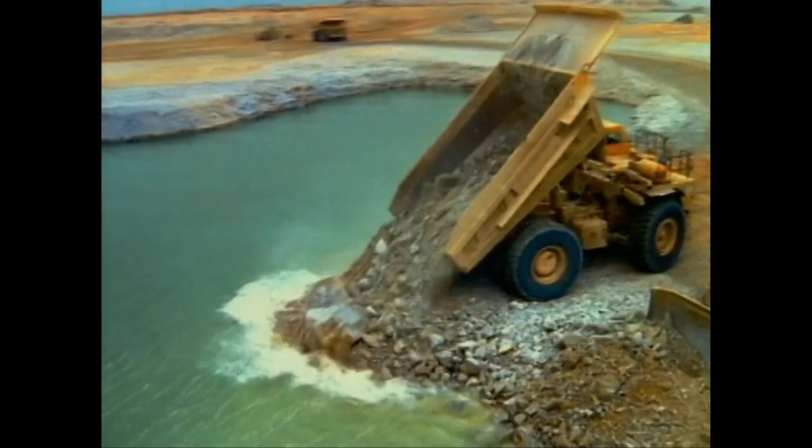Hong Kong desperately needed a new world-class airport. But where to put it? There was only one option: to build it 16 miles out at sea. But that would require the largest engineering project in history. It would mean building the longest bridges in the world and massive new underwater tunnels, 22 miles of new superhighway, and high-speed rail.

Builders estimated the project would take decades, but they were given only 7 years. Could engineers and builders working on an absurdly tight deadline pull off a project this extreme? And would building such colossal structures only invite disaster in the future?

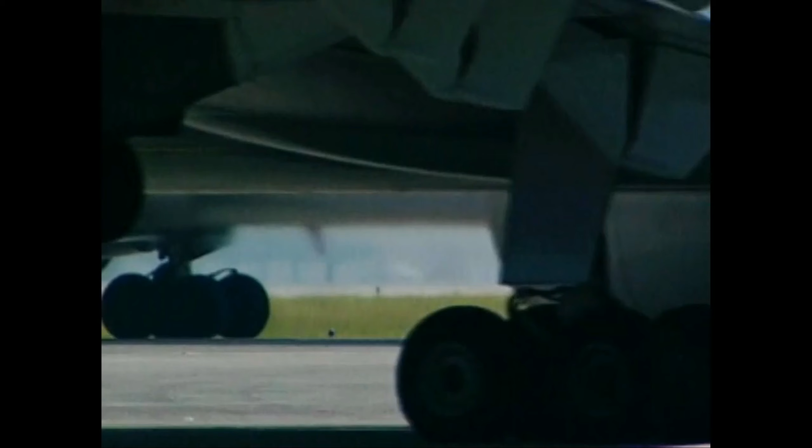July 6, 1998. New York's JFK Airport. Cathay Pacific Flight 889 prepares for takeoff. It's bound for Hong Kong, but it's about to fly into a great unknown. The pilots have made this trip hundreds of times before, but never like this. Because even as the plane lifts off in New York, in Hong Kong, the airport suddenly goes dark. It's not a power failure.

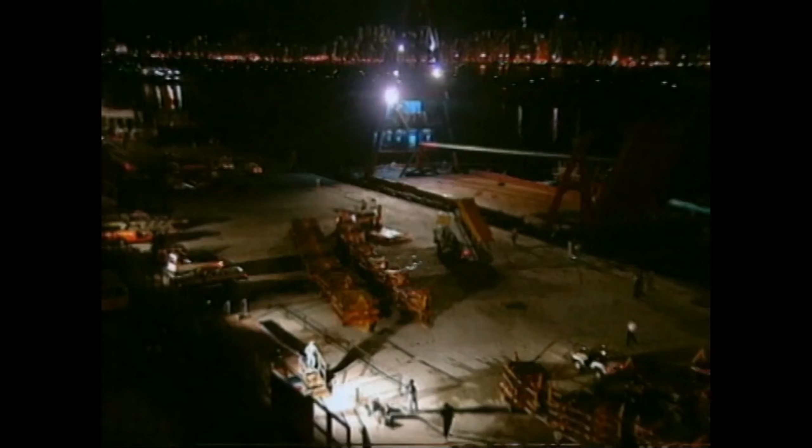This is an historic event. The culmination of nearly a decade of furious planning and construction. Hong Kong has just shut down one of the world's major international airports. And with planes en route, is moving the entire operation, staff and equipment, to a new one in only 7 hours. It's the final hurdle in a 7-year race to complete the largest, most ambitious civil engineering project of the 20th century.

It all began in the 1980s, when Hong Kong faced a critical turning point. By then, it had become one of the world's great economies. But these towering skyscrapers masked a glaring weakness. Kai Tak Airport. Dangerous and outdated, the airport sat crammed in the heart of the city. Kai Tak made every flight into Hong Kong a white-knuckle flirtation with disaster, forcing massive jumbo jets to steer past mountains and skim the tops of apartment buildings in order to reach the tarmac.

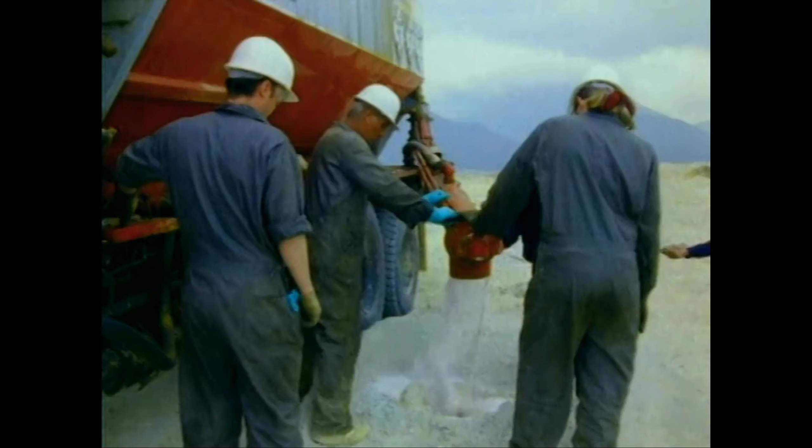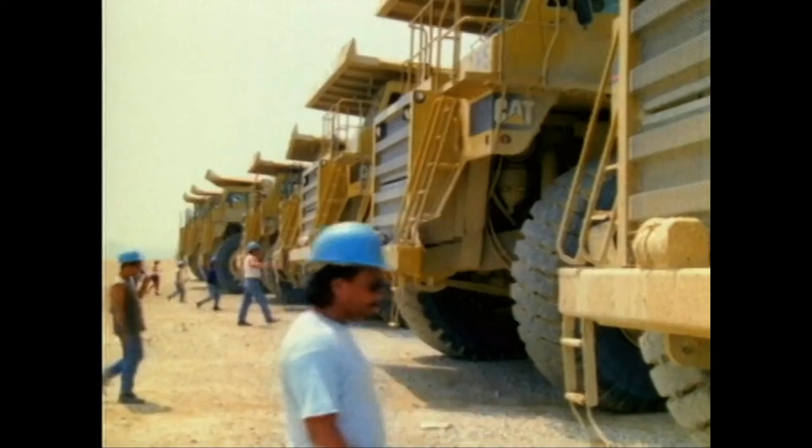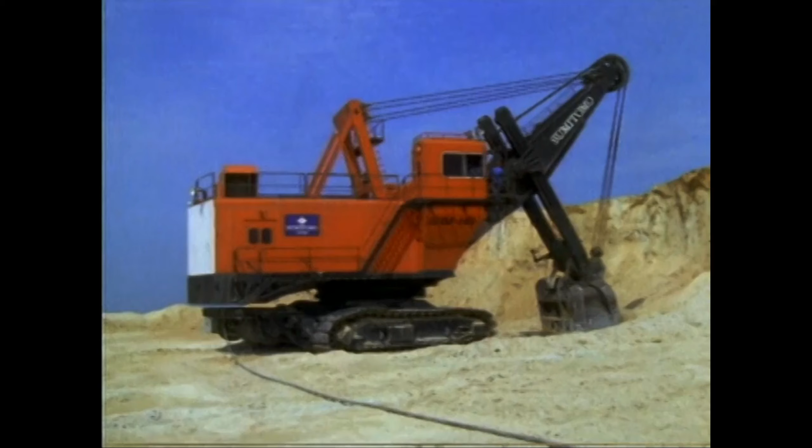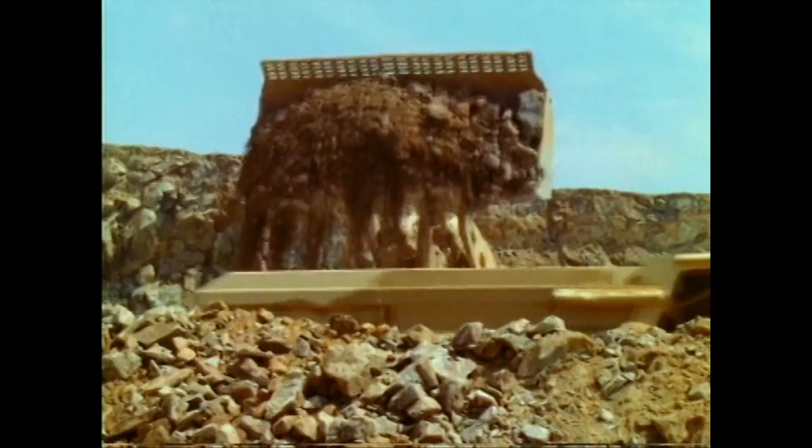With towering heaps of blasted rock as far as the eye could see, an army of workers was brought in. Their mission? Move 200 million tons of rock. Commanding giant earth movers, they demolished the landscape, carting away hundreds of millions of tons of rubble. But all that material would not go to waste. It would soon be recycled as fill to turn the two small islands into a single larger one.

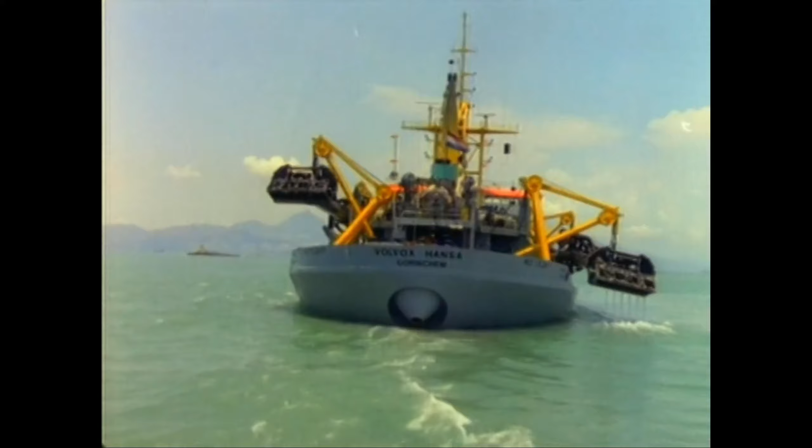But before that could happen, the sea floor needed to be cleared. For this task, a fleet of the world's largest underwater dredgers arrived on the scene. Like giant vacuum cleaners, their underwater hoses scoured the ocean bottom, removing a layer of soft mud 40 feet thick to expose the stable rock below. The cleared seabed provided a solid base for what was to come next.

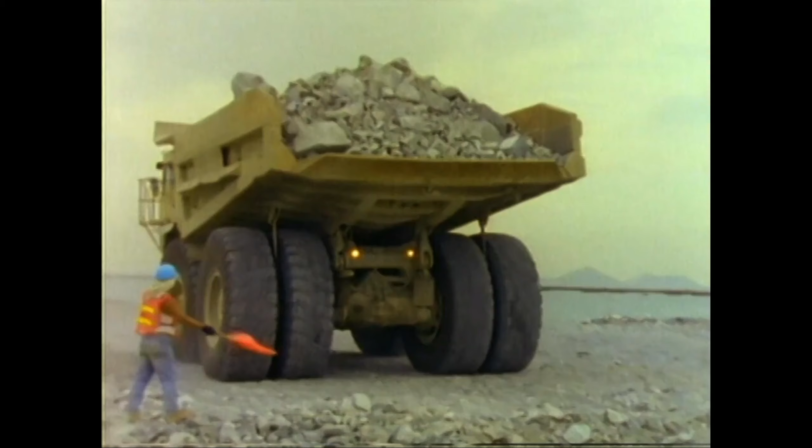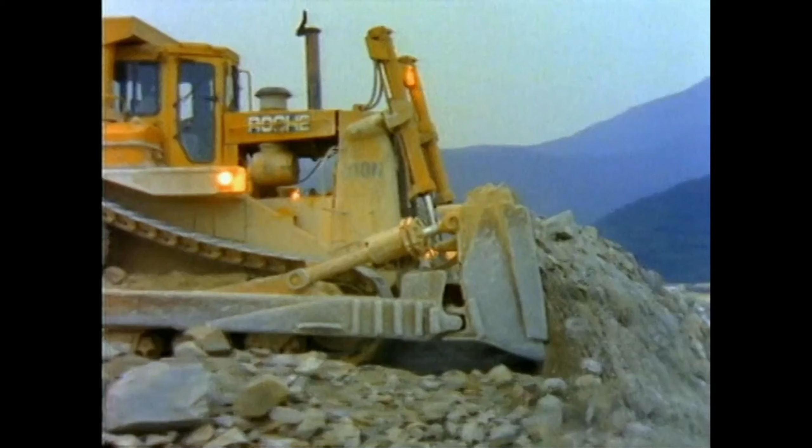A layer of sand, followed by the pulverized remains of the island's mountains. With every truckload, the mile-and-a-half gap between the two small islands grew steadily smaller. Everybody was under extraordinary time pressure. It was one of the world's biggest land-moving exercises in the history of the world.

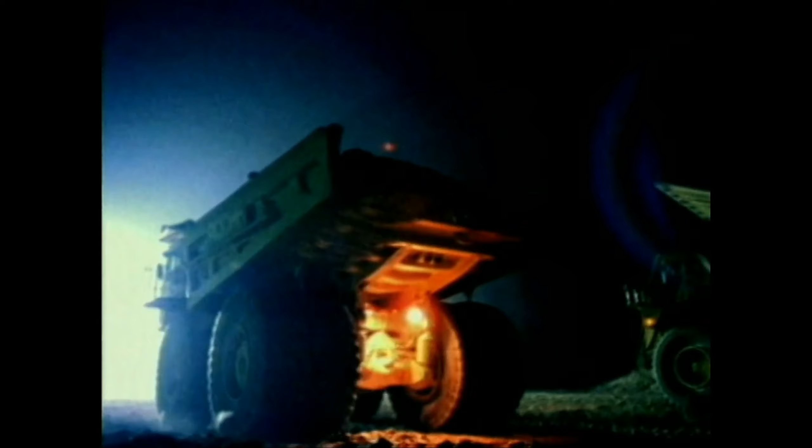Working day and night, inch by inch, workers on land and sea slowly turned two islands into one. By the time they finished, the workers had moved 600 million tons of earth, enough to fill the Roman Colosseum 200 times over.

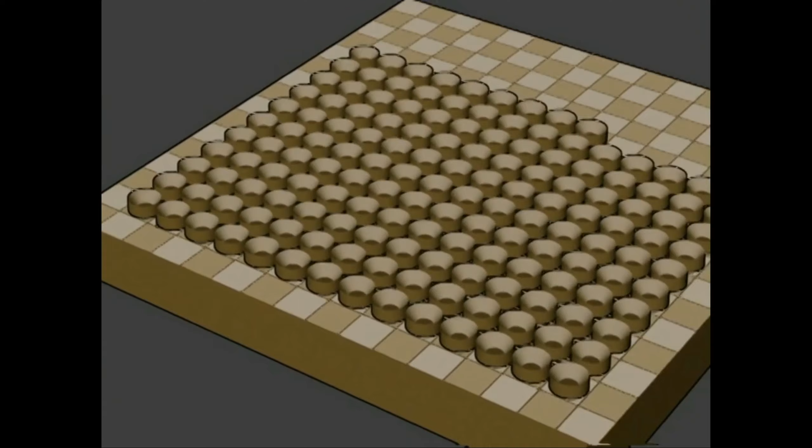As the airport island was taking shape, construction crews had begun the daunting task of connecting the island to the city. Plans called for new tunnels, bridges, and highways to be built across 22 miles of land and water. Almost immediately, engineers ran into a problem: finding a way out of downtown across Victoria Harbor. Two automobile tunnels had already been built in the harbor decades earlier, but they were now overloaded with traffic, sometimes causing 2-hour traffic jams at rush hour.

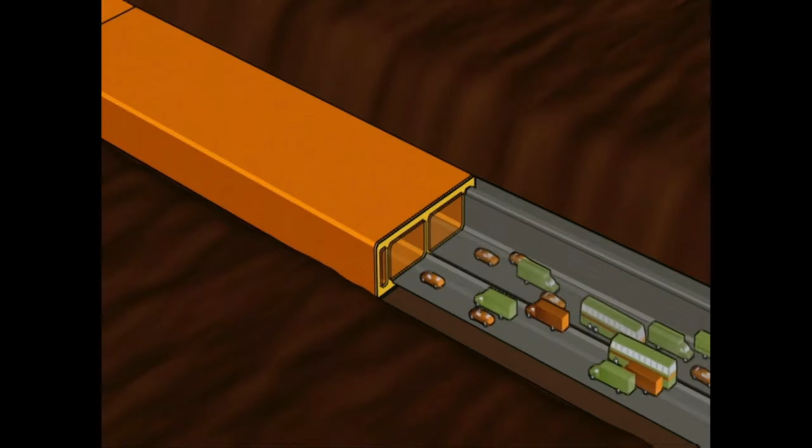A third, much larger tunnel was needed. It had to be wide enough to carry 6 new lanes of traffic and long enough to span the 1-mile underwater crossing. Engineers devised a plan to assemble the tunnel underwater from mammoth concrete and steel sections. The sections were manufactured at a harborside quarry 10 miles from the final tunnel location. Each one weighed 35,000 tons when finished, as heavy as a fully loaded ocean liner.

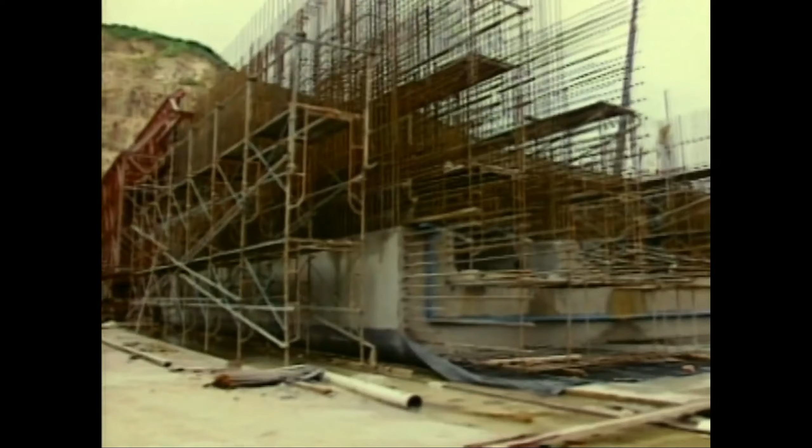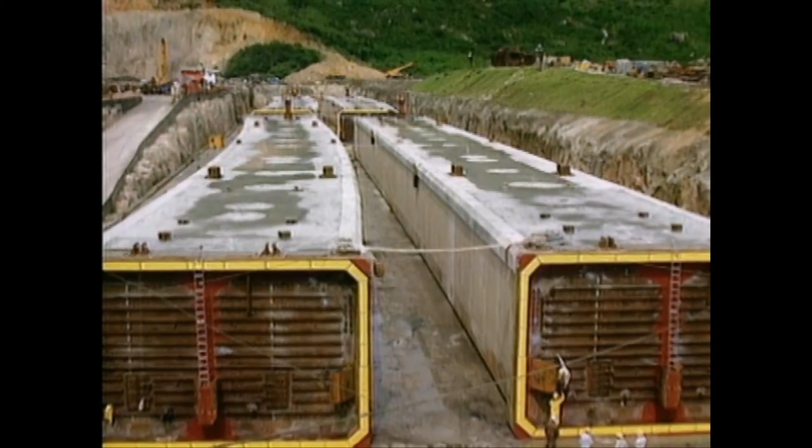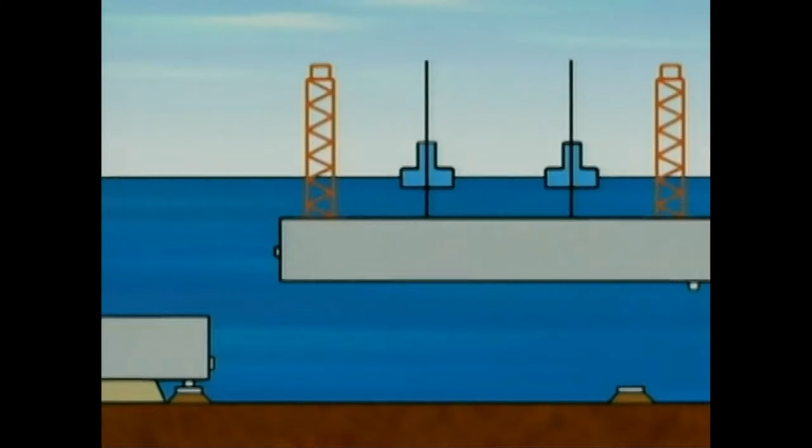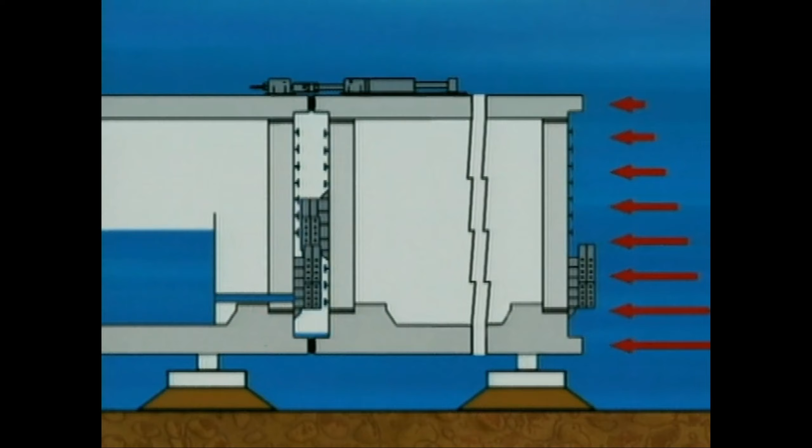When a section was completed, builders capped both ends with watertight seals and then flooded the quarry. The massive tunnel sections were then floated out into the harbor. Once at the final location, the seals were broken, flooding the section and causing it to sink. Powerful hydraulic jacks pulled the sections together and created a watertight seal. Then, builders made the final connections from the inside, and the tunnel was complete. It lay more than 50 feet underwater and stretched for more than a mile, connecting the busy island of Hong Kong to the mainland.

With one waterway conquered, an even greater challenge loomed. Along the proposed route from downtown Hong Kong to the airport, there was another major body of water to cross: a 3-mile span from the mainland to North Lantau Island. Initially, planners hoped to build another underwater tunnel here to carry airport traffic. But the channel turned out to be too deep, and heavy shipping traffic at the surface would have made underwater construction far too dangerous. So engineers had to come up with another solution. It was as bold as it was breathtaking.

They proposed not one, but 2 massive bridges, long enough to span the waterways and high enough to allow even the most gargantuan ships to pass underneath. The longer span, more than 1.5 miles long, would be one of the longest suspension bridges in the world. But it was a risky proposal. The bridge would need to withstand one of the most destructive forces on Earth. Typhoons. Packing devastating winds up to 200 miles per hour, as many as 8 typhoons slam into Hong Kong each summer. Any bridge built here would have to first prove its strength.

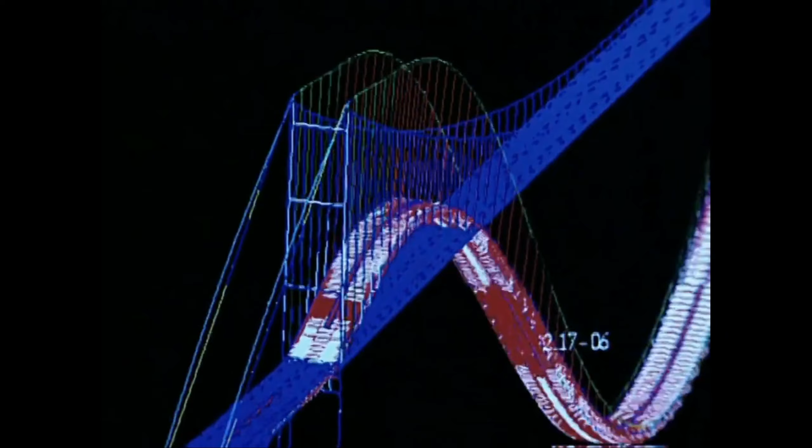To understand how winds would affect the structure, engineers first created computer models. This model simulates the motion of the suspension bridge in a 40-mile-an-hour wind, amplified 1,000 times, allowing engineers to identify potential design flaws.

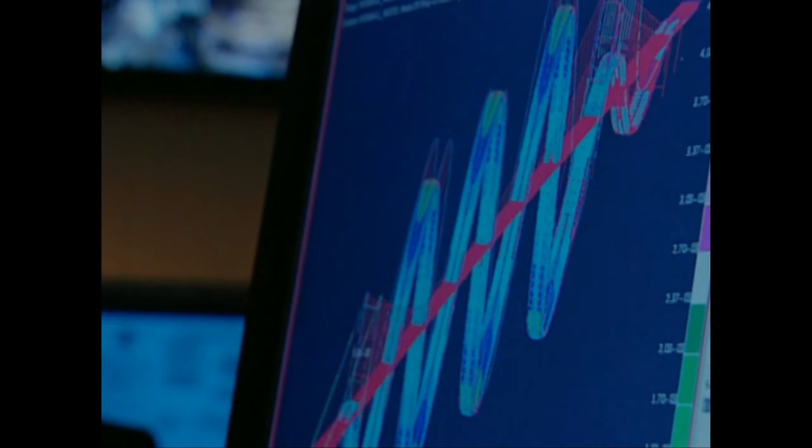Using the data collected, engineers next built a detailed scale model. They placed it in a high-speed wind tunnel and subjected it to a simulated Category 10 typhoon. The results were disturbing. The bridge would become dangerously unstable in high winds.

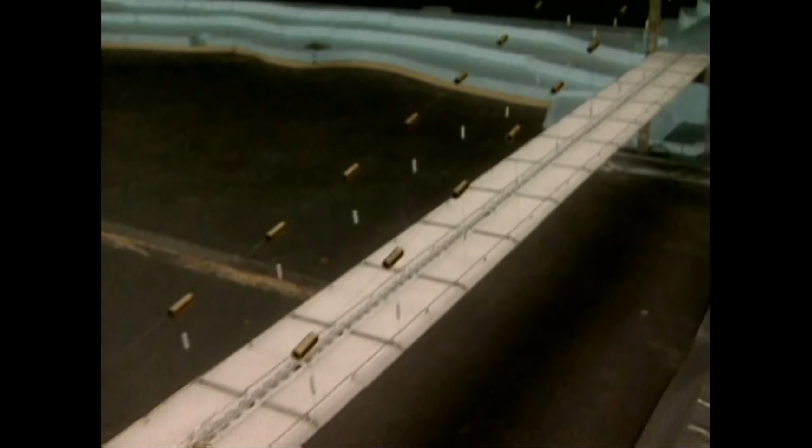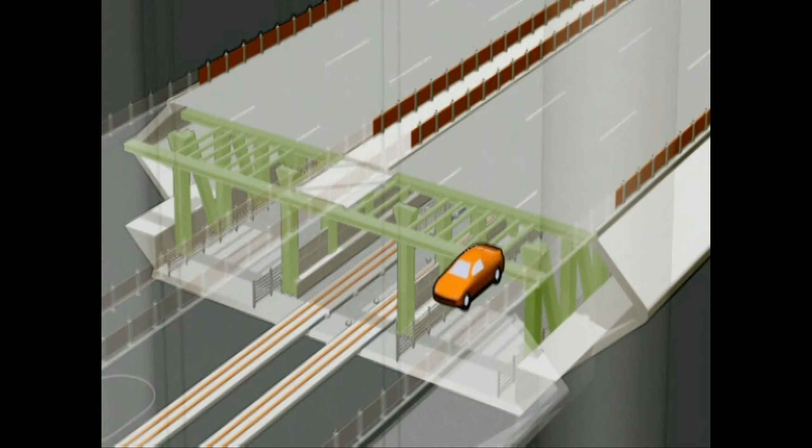Designers couldn't make the bridge any shorter, so they made it heavier. Below the main roadbed, they added a lower deck for trains and 2 more lanes for traffic. This design stiffened the bridge. It solved a potential problem and added capacity.

But for the builders, the design raised the stakes. Now they had to build the largest double-decker suspension bridge in history, with no extra time to do it. First, the building site was leveled. The next step, build 2 mighty bridge towers to shoulder the enormous weight of the fully loaded structure. They went up like skyscrapers, each more than 60 stories tall.

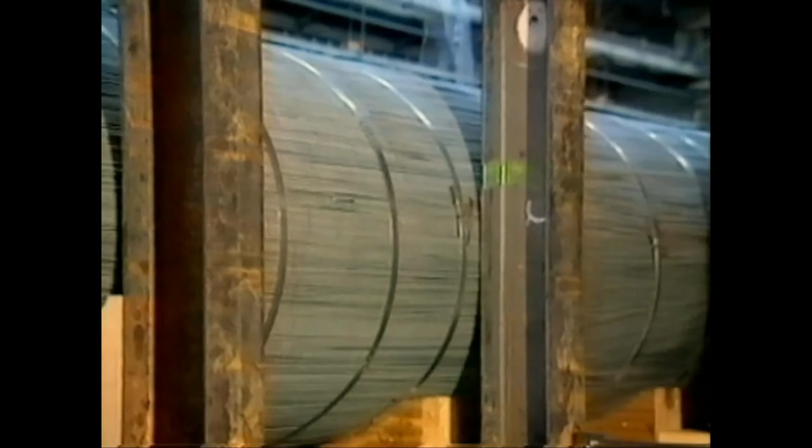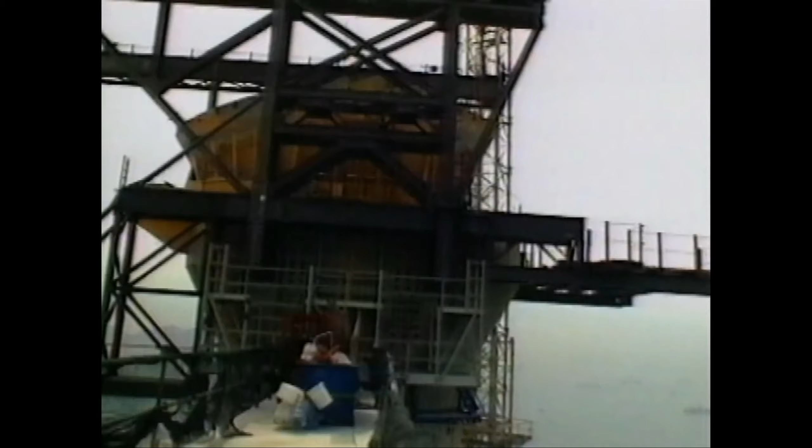From these dizzying perches, heavy steel suspension cables would need to be hung to support the massive road deck. But the giant cables needed to be 3 feet in diameter, and each weighed 15,000 tons. Because of their massive weight, the cables could not simply be assembled on the ground and then hoisted into place. Instead, bridge builders used an ingenious but risky technique. They built the massive cables in the air.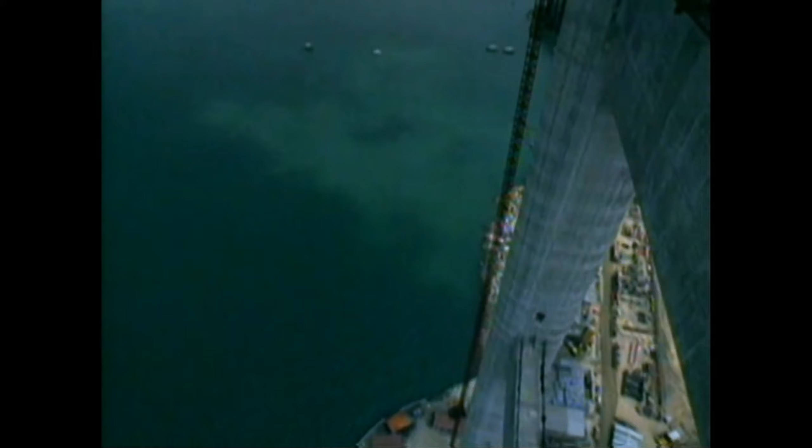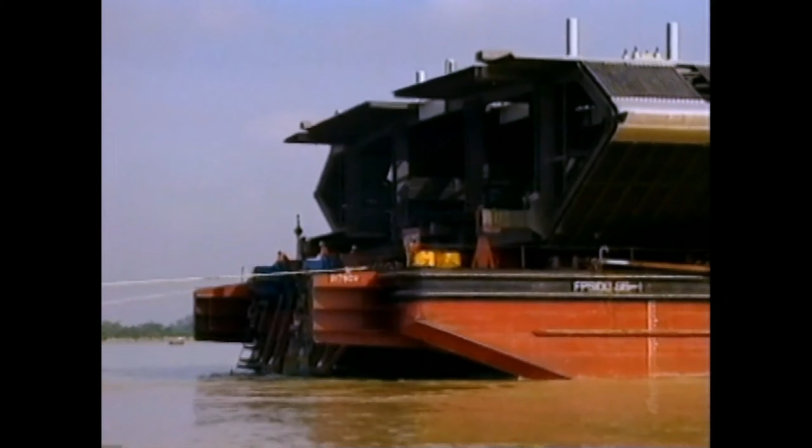Two spinning wheels shuttled several small strands at a time back and forth across the towers, each pass adding girth to the massive cables. Once the cables were secured in place, workers could tackle the final and most dangerous part of the job: installing the huge bridge decks. Each prefabricated section weighed 1,000 tons and had to be hoisted from a barge on the water, 200 feet straight up.

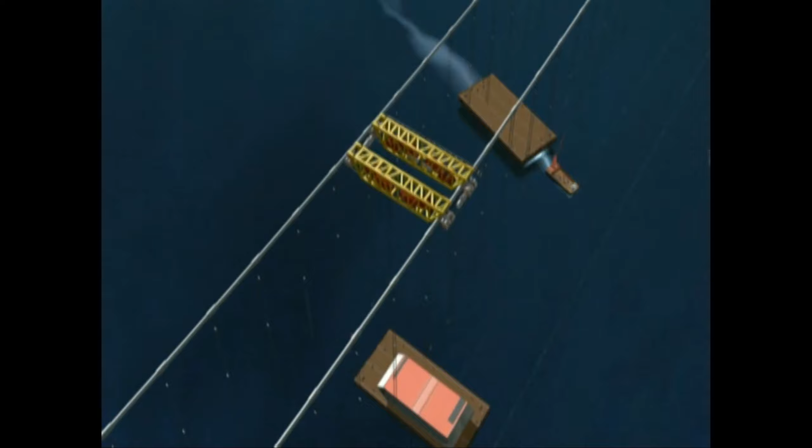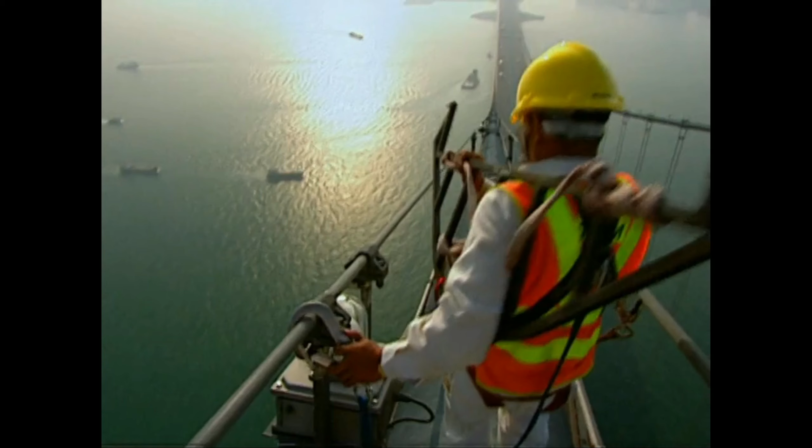Starting at the center and working out toward the towers, builders painstakingly raised each deck section into place. Finally, 5 years after the project began, the bridge was complete. It was quite staggering to me and to others, I think, that we had constructed this monument, the sort of bridge to the future.

The completion of the bridge and the tunnel provided the two crucial water links on the route from the city to its new airport. But those two links needed to be connected to each other. The project called for two brand new highways. The first, the West Kowloon Expressway, would take traffic from the tunnel 6 miles down the coast all the way to the new bridge.

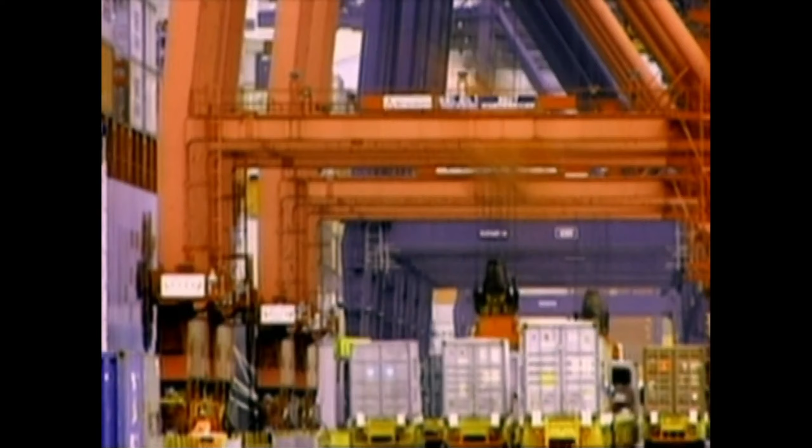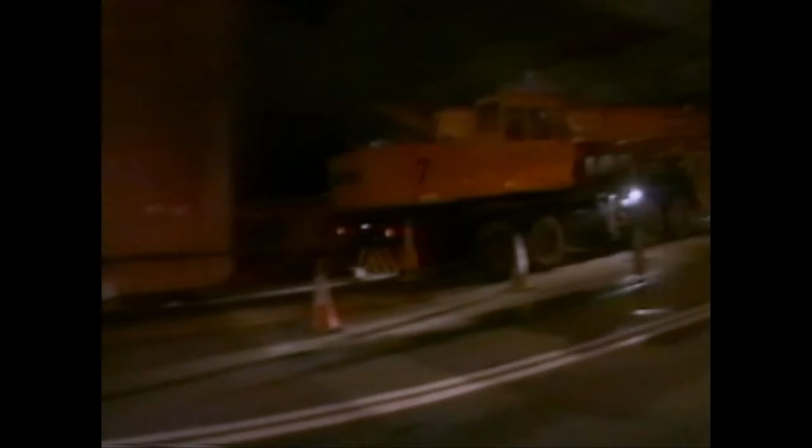Building it through the congested Kowloon Port District was like trying to arc a bridge over a raging river. To keep the port open and traffic moving, builders were forced to construct the new highway over an existing 15 lanes of traffic. And that wasn't all. To minimize traffic slowdowns, the construction crews could only work at night. Road crews raced to bolt together Hong Kong's first ever highway in the sky.

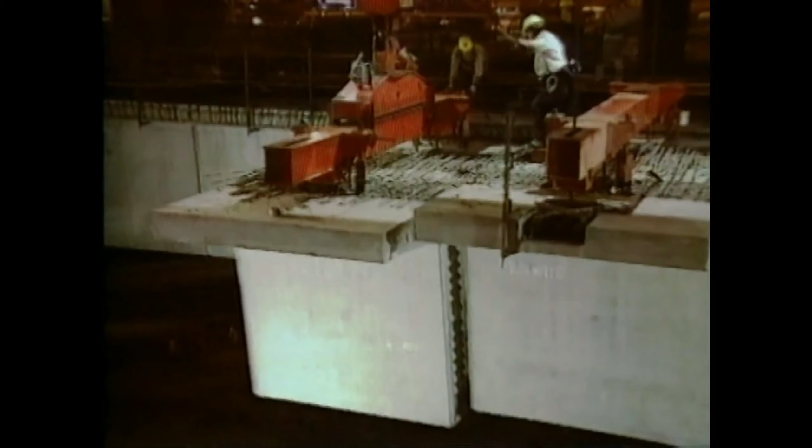Meanwhile, the other highway, the final link in the chain, was also under construction. This 8-mile road, called the North Lantau Expressway, would take traffic from the bridge to the airport. But this last leg also presented a major engineering challenge. The terrain where the highway was to go was made up of rocky, steep hills. So engineers came up with a novel solution. They decided to extend the coastline out into the bay by more than a half mile. The highway, rail, and the airport's power lines would travel over this newly created level corridor.

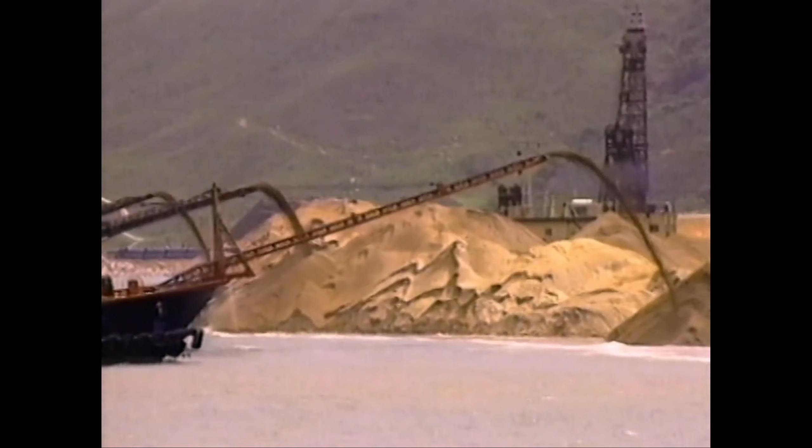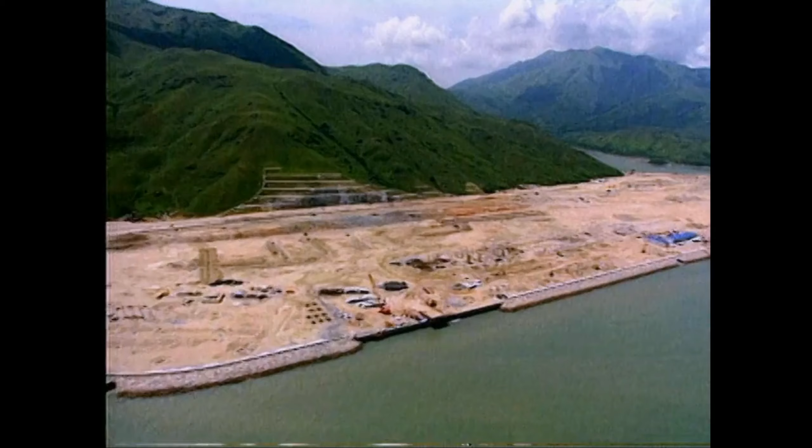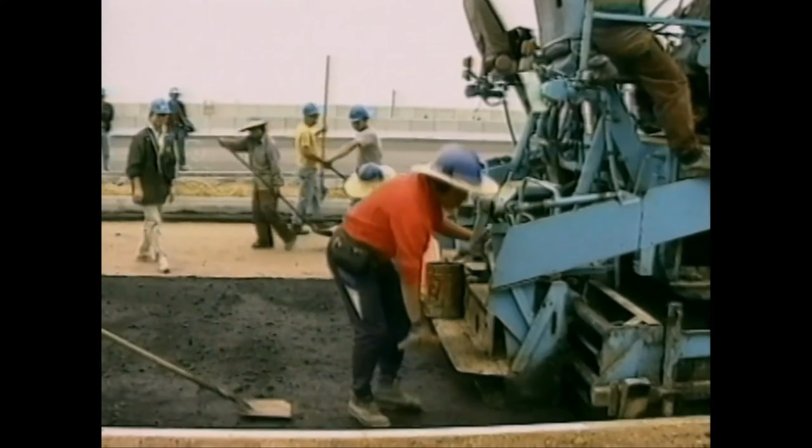Builders dumped more than 25 million tons of rock into the ocean. Enough stone to build a 5-foot-high wall from Washington, D.C. to San Francisco. As a consequence of the high level of activity, we actually crammed into 4 to 5 years, 10 to 15 years of work effort. When this final link was finished, the route would be complete.

A brand new thoroughfare winding its way from the airport along 8 miles of coastal highway, across one of the world's longest suspension bridges, over 6 miles of elevated highway, through an underwater tunnel into downtown Hong Kong. And yet, it wouldn't be enough. The new route would be great for cars and trucks, but it would do nothing for the 2.4 million people who use the subway.

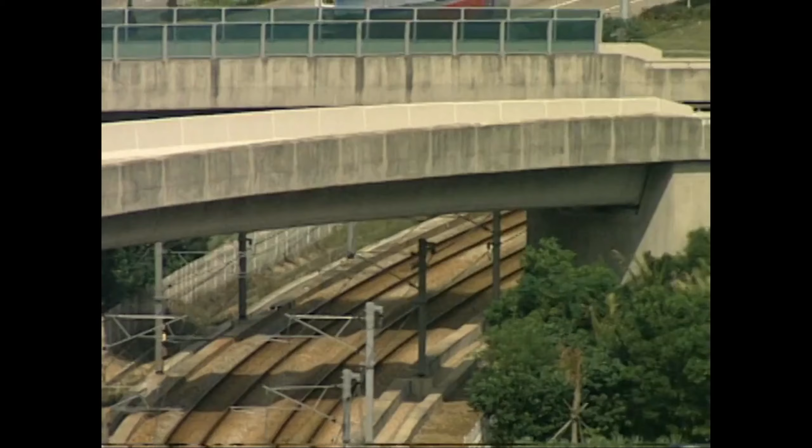So engineers decided to add an ultra-high-speed rail line. It was an historic first. Anywhere else in the world, you will find that the railway has been fitted in afterwards. So we had an opportunity to design a railway in conjunction with the design of the airport itself.

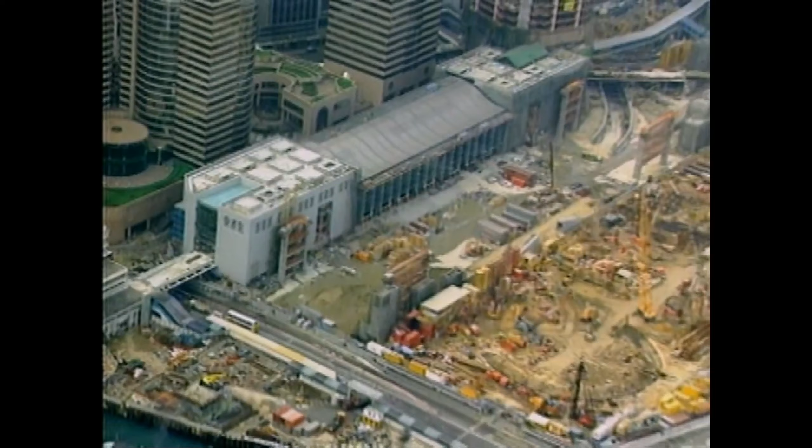The new Airport Express would need a 15-acre station downtown. Hong Kong didn't have 15 feet. Planners were not to be denied. Engineers created 50 acres of new land in Victoria Harbour. In only 2 years, the new station rose out of the ground. A foyer to the distant airport.

Here, passengers could gather, check their bags onto their flights, and settle in for a 20-minute ride. Beneath the harbor, across the bridges, along the coast, and step off the train inside the world's largest passenger terminal.

There was just one problem. There was still no passenger terminal. With only 2 years left on the ticking clock, construction finally began on the terminal complex. The plan called for the largest enclosed space in the world, more than a mile long.

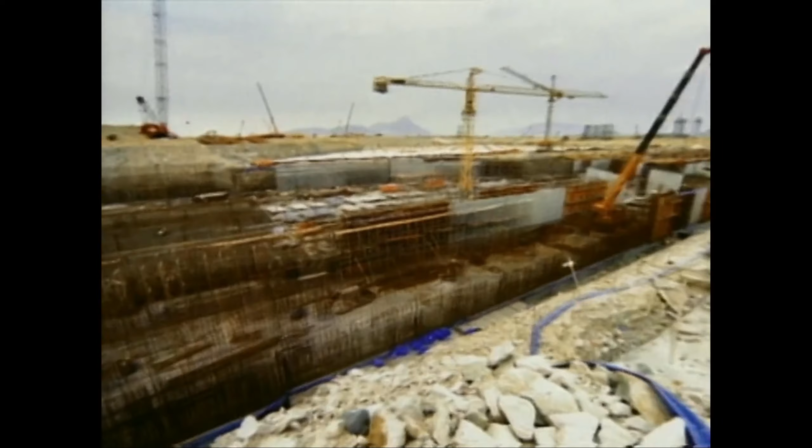But as builders began work on the terminal's massive foundation, they made a chilling discovery. Ocean tides were forcing groundwater up into the foundation. If not corrected, that groundwater would push the terminal off its foundation. All 6 million square feet of it. Engineers knew they couldn't fight the force of the tides. They needed to find a way to secure the building against that steady pressure.

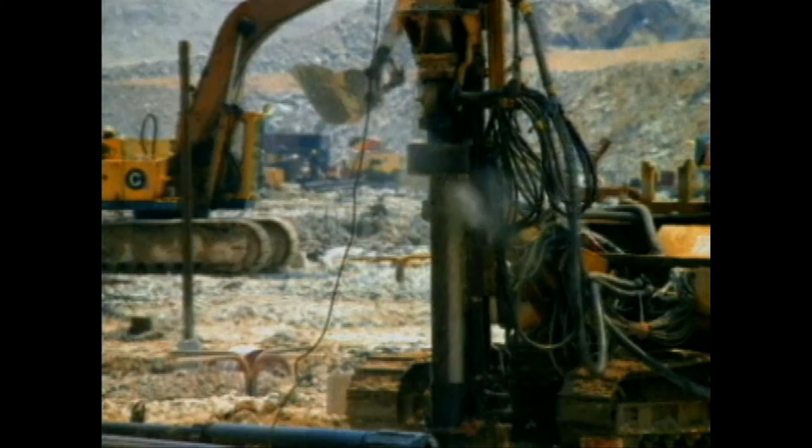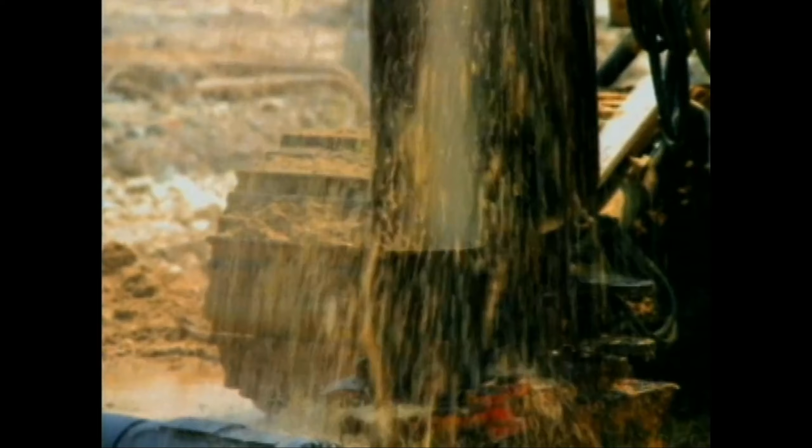Using massive hammer drivers, they pounded huge concrete piles into the earth, each weighing 25 tons. The piles went through the landfill down to the ocean floor, effectively nailing the terminal to the bedrock. With the foundation secured, work on the terminal itself could begin.

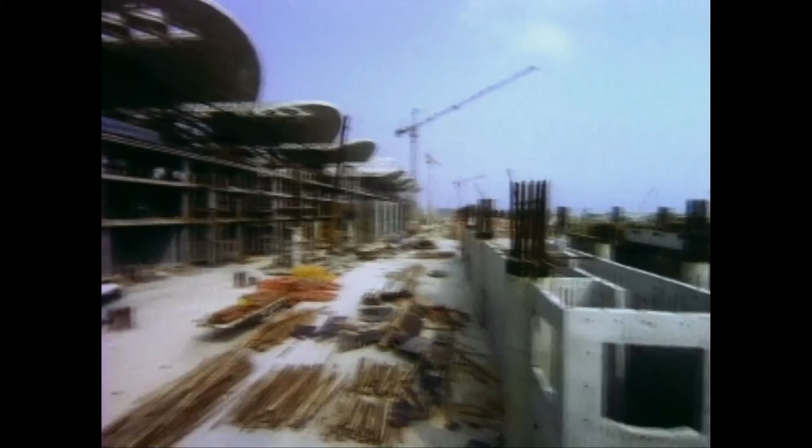It was to be the crown jewel of the entire project. A passenger terminal of epic proportion. Its unique design was symbolic of flight. But just as construction was about to begin, project managers came to another disturbing realization. There was simply no way they could build the terminal fast enough to make the looming deadline.

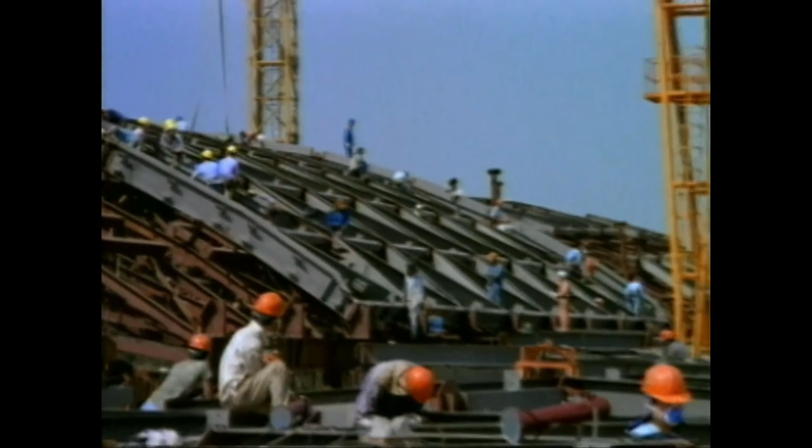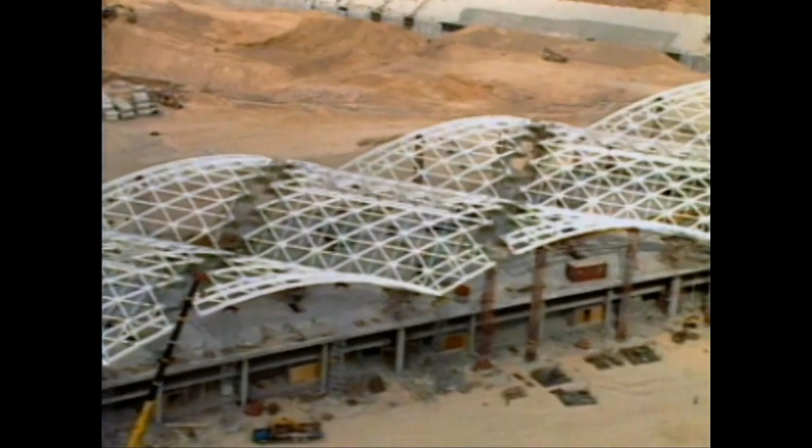Project managers were forced to enter a new series of negotiations with the Chinese, who were getting ready to assume control of Hong Kong in less than 2 years. While negotiations continued, engineers pressed ahead with the daunting task of raising the terminal roof. Luckily, the design itself was remarkably simple. It was made up of a repeating lattice of steel trusses that could be mass-produced on a gargantuan scale.

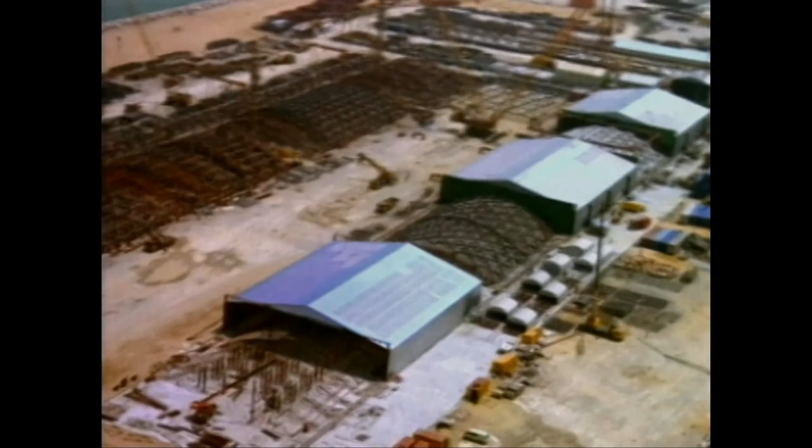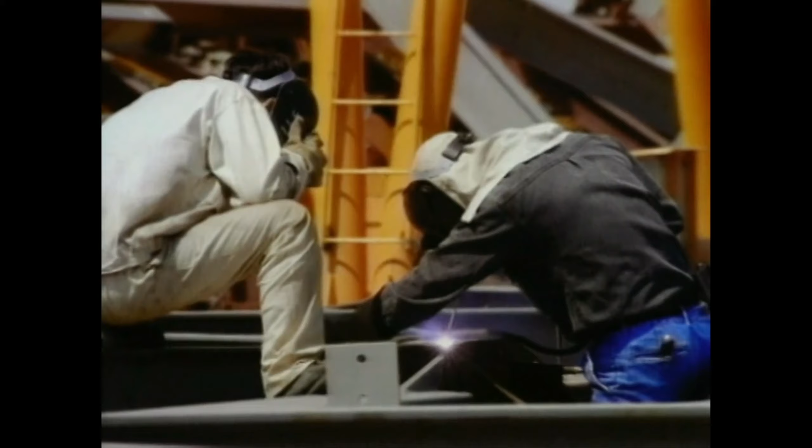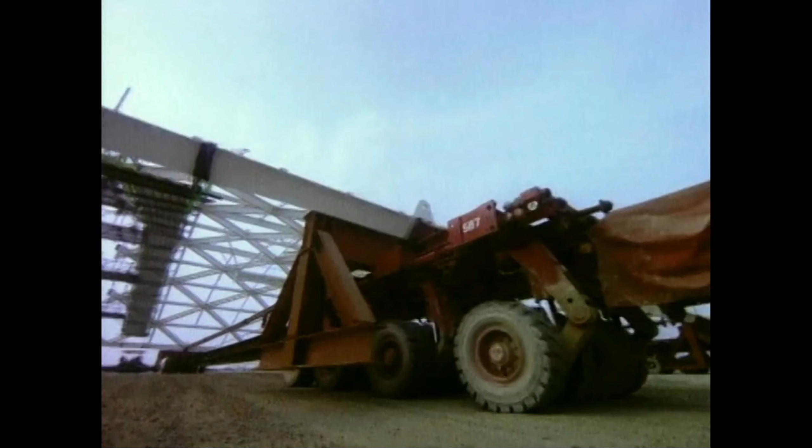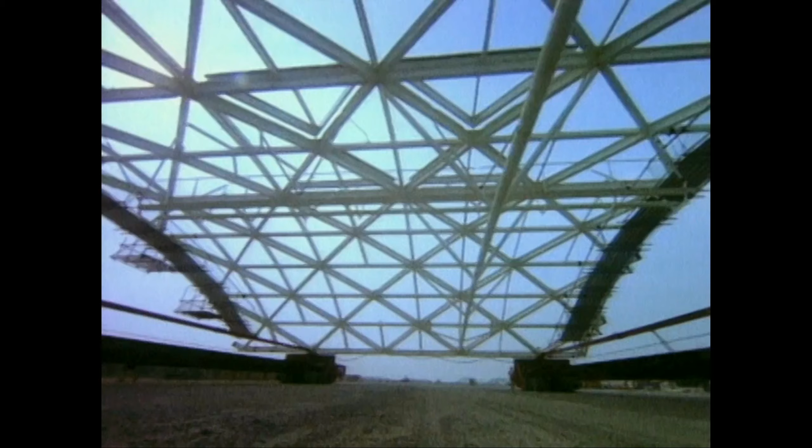Builders set up an enormous assembly line to build 136 identical roof segments, each weighing 140 tons, and crafted out of more than 100,000 individual pieces. But the roof segments were so large, they couldn't be moved with existing equipment. So engineers came up with this. A behemoth robotic transport crane, piloted by a single operator with a remote control. Once at the site, giant cranes stretching 20 stories high carefully lifted each piece into place.

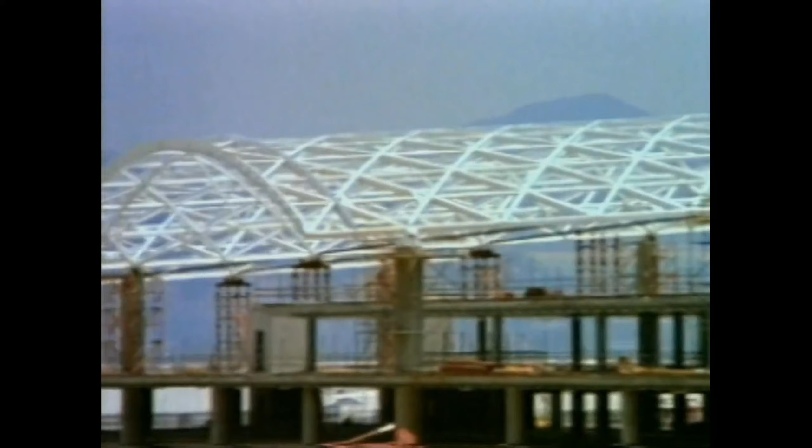On the other side of the island, workers erected the airport's air cargo terminal. A state-of-the-art facility, it was designed to handle the flood of containers that would pour through the airport every day.

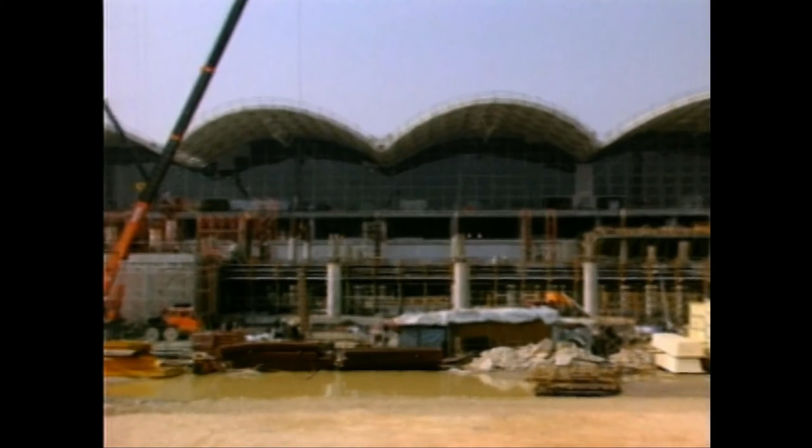July 1st, 1997. The day of the handover is here. For the first time ever, a democratic society with a free market economy is turned over to communist control without a shot fired or a voice raised in protest. But there's a hitch. The airport is not finished. And now China is in the driver's seat.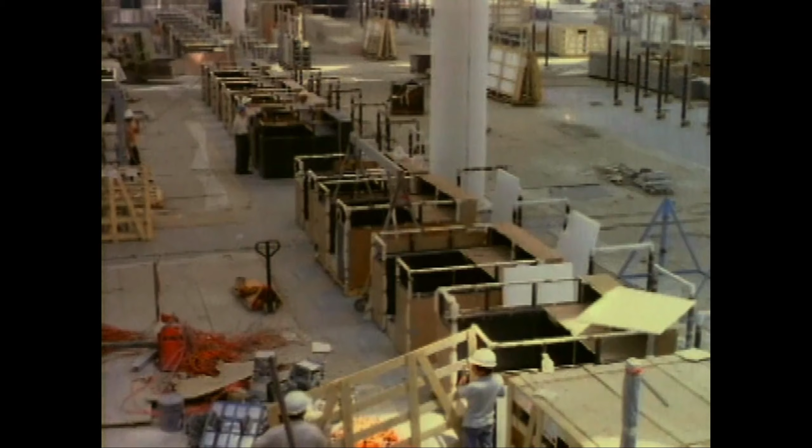Engineers are afraid that the Chinese will pull the plug and abandon the project so close to completion. They do not. Realizing that the airport is crucial for Hong Kong's survival, the Chinese agree to 1 additional year to complete the project. But construction teams know that's not enough time.

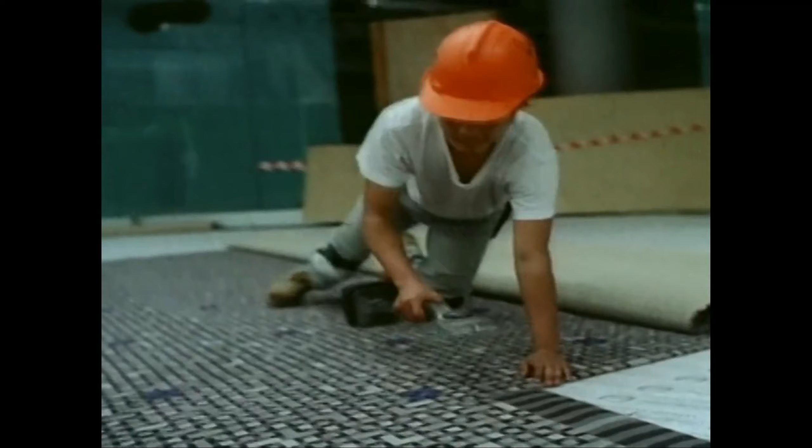That's because the airport will utilize a vast array of new technologies, including new systems for air traffic control, flight information, customs screening, and security. The 1-year deadline leaves insufficient time for testing these new systems.

But on July 6, 1998, time was up. 7 years of round-the-clock construction, a $20 billion price tag, and 10 million man-hours had come down to this. One final challenge, perhaps the most ambitious of all. Shut down the old airport, divert all traffic, pack up staff and equipment, and relocate to the new airport in just 7 hours.

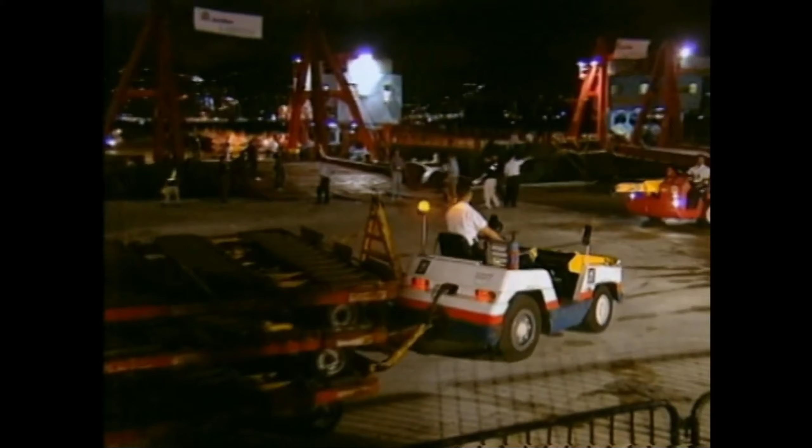Meanwhile, thousands of miles away, Cathay Pacific Flight 889 crosses over Hawaii. If all goes according to plan, it'll be the first plane to touch down at the new airport at 6:30 a.m. But for now, it's a Hail Mary pass, because the new airport is still not operational. At 1:17 a.m., the runway lights at the old Kai Tak Airport are switched off for the last time. Goodbye, Kai Tak, and thank you.

The massive road, rail, air, and sea lift gets underway. It will take more than 800 trips to ferry the critical contents to the new Hong Kong International Airport. As the sun rises on July 7th, 1998, the new air traffic control makes contact with its first customer.

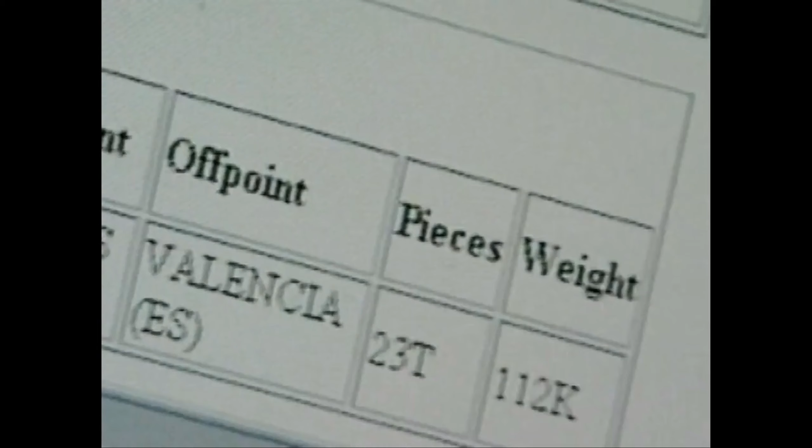Across the tarmac at the air cargo terminal, things are even worse. The communication link with the old airport goes down. And then, someone accidentally deletes a critical database. The most technologically advanced airport in the world is now forced to sort all cargo by hand. But they can't keep up. Soon the tarmac is packed. The airport is forced to turn away 55,000 tons of freight. It's a discouraging opening day.

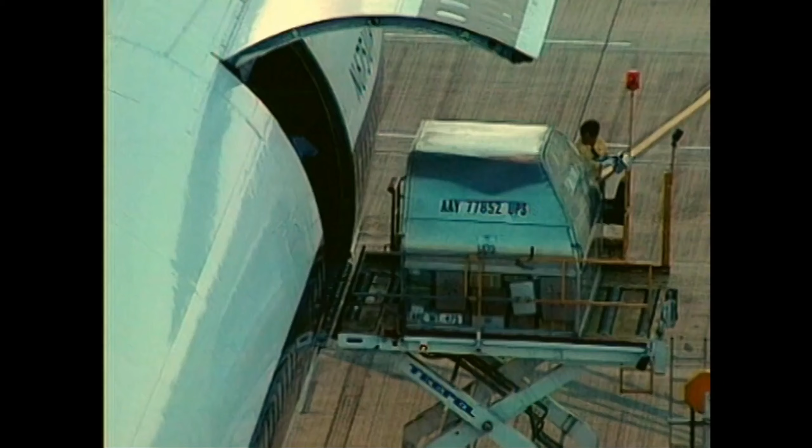Within weeks, passenger numbers begin to climb. Things are almost running smoothly. More than 500 flights arrive or depart each day, double the traffic handled by Kai Tak at its busiest. The cargo terminal also gets the kinks out. Just as planned, the vast maze of fully automated lifts and cranes moves, sorts, stacks, and transfers more than 4,000 tons of cargo a day. Everything from lobsters to helicopters. Life was returning to normal for the young airport.

Until Mother Nature came calling. Only a year after the grand opening, Typhoon Sam slammed into Hong Kong. Winds gusted over 100 miles an hour. Right in the middle of the storm, China Airlines Flight 642, carrying 315 passengers, began its final approach. The plane had already tried once to land, only to abort and return to the skies. In a fateful decision, the pilots attempted another landing.

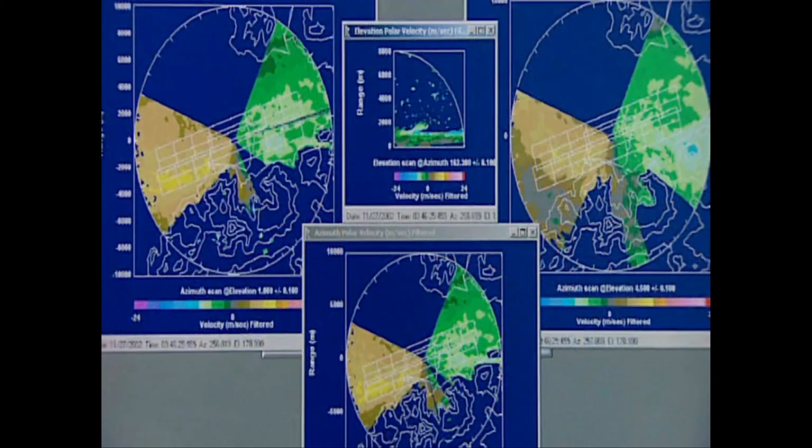In the final seconds, the plane's right wing suddenly dipped, colliding with the runway. The plane flipped completely over and skidded down the tarmac. Emergency crews rushed to the burning plane. Still, 200 people were injured, and 3 died. It was the first serious accident for the Hong Kong International Airport. It led to stricter flight rules and beefed up weather radar. The new infrared system will most likely help to prevent similar accidents in the future.

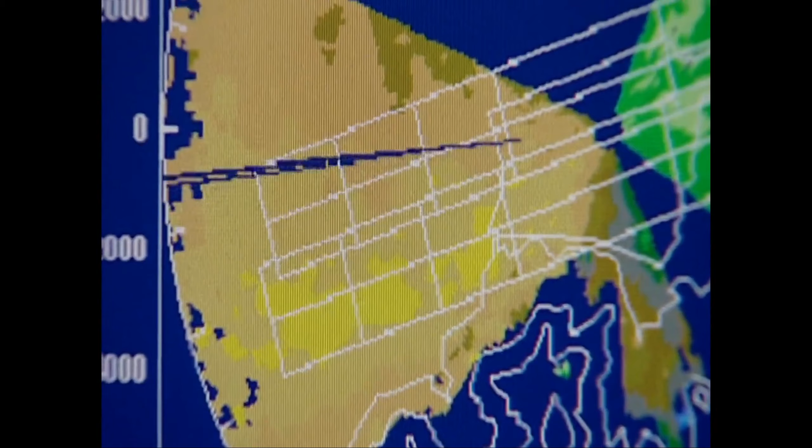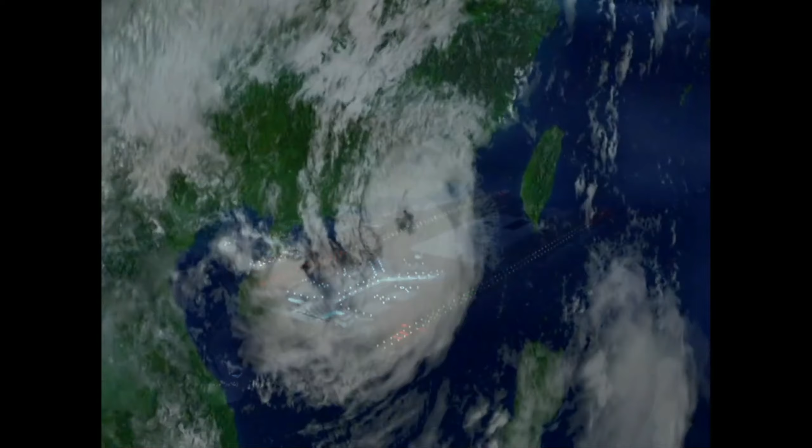But what about the terminal itself? Can such a huge open structure really stand up to the worst that Mother Nature can throw at it? The year is 2010. A Category 10 typhoon with wind speeds up to 200 miles per hour bears down on Hong Kong. The storm's track has it making a direct hit on the airport. Emergency plans go into effect. Air traffic control diverts incoming planes to other airports, and outgoing flights are canceled.

But now there's an even greater concern. The hollow glass terminal building now seems like a sitting duck. Engineers worry that the building could be ripped right off its foundations. The building trembles and groans. And then, the sound of shattering glass. It's a terrifying occurrence, but it actually relieves the pressure from the wind, possibly saving the building. The largest enclosed structure in the world survives with minimal damage.

While it's unlikely that anything this complex will ever be built again as a single project, the lessons learned are invaluable. And as other cities and countries look to their futures, we can have no more inspiring an example of extreme engineering than Hong Kong.